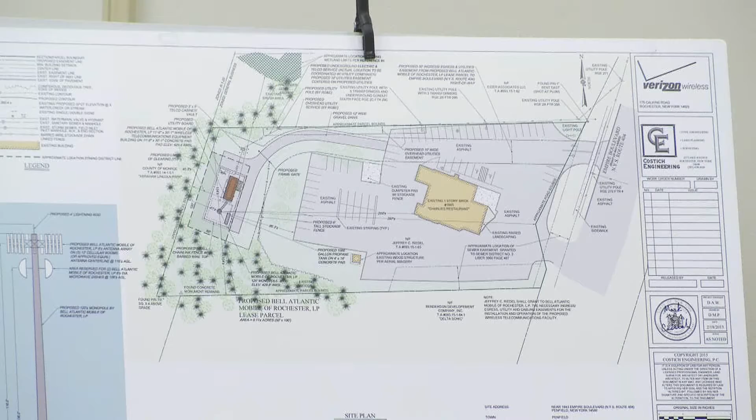Once this gap was zeroed in on by the RF engineers, a site selection process was undergone by Brett Morgan and his company, where they looked at over 35 different parcels in this immediate area to see how they would work from a technological perspective and also a land use perspective for the possible location of this facility. Those 35 sites included both the Charlie's Restaurant site, which we are applying for tonight, and the flagpole site that you were all discussing during your meeting.

Following the PRC's request, we submitted on March 12th some more detailed information that Mark was going over, and if you'd like we can turn to that. I know Mark pulled it up during your work session, but you can see that the coverage provided by that existing flagpole site is much more deficient when compared to the coverage that would be provided here, shown in green, by the proposed Charlie's Restaurant site.

That is for several reasons, which Mark touched on. The main reason is that the only available space within that existing flagpole site is at 46 feet antenna centerline, which isn't nearly high enough to provide the coverage we're looking for in this area. In addition, because of the way flagpole sites are, we can't fit all of the antennas that we need, and there's also the issue of the ground area for the equipment.

So after looking at all of those 35 sites, it was determined that the proposed site provided the coverage that was needed to fill that gap. It was also deemed to be a good site from a land use perspective. It's to be located in the back parking lot area. Here's a color rendering showing the existing site.

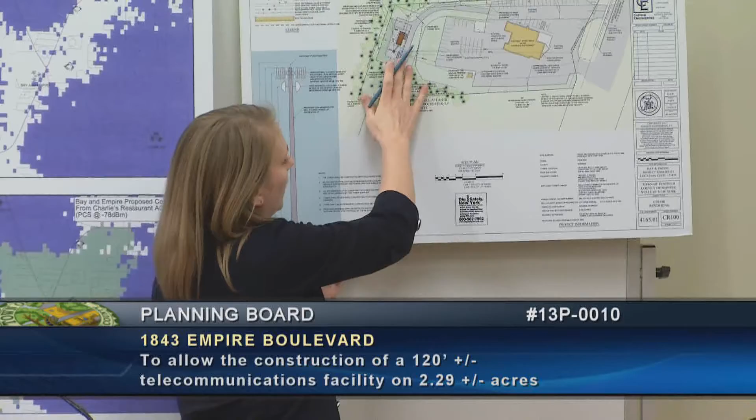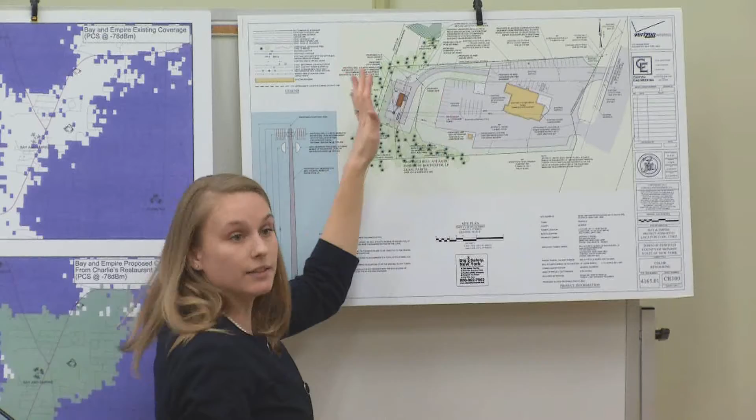Also, another interesting thing about this site is that the grade slightly declines as you go towards the site compound. So in addition to the natural buffer provided by the existing trees, there's natural screening that takes place because of the decline in the grade.

So I can answer any questions that you have at this point about either our March 12th follow-up submission to the PRC comments or the site, the project in general.

Anybody on the board? Good evening. So you looked at 35 sites, that's correct. So the PRC gave you some comments back regarding the requirements for a co-location study.

You gave us a response, and I just want to get clarification from you. Did you only look at your own towers, or did you look at all available opportunities for mounting antennas on existing towers? Absolutely. The company fully investigated any opportunity. Looking on our own tower wouldn't be helpful because we would already be there, so that wouldn't provide us any new coverage. So all of the sites we looked at were non-Verizon Wireless facilities, either raw land sites or existing towers, including an existing flagpole site, which is a stealth tower design.

Yes, I'm just curious, because I don't know that much about this stuff. But how come you get a couple of those white dots in there, but there's some green outside, like beyond that point? What are those blackout areas that don't get covered?

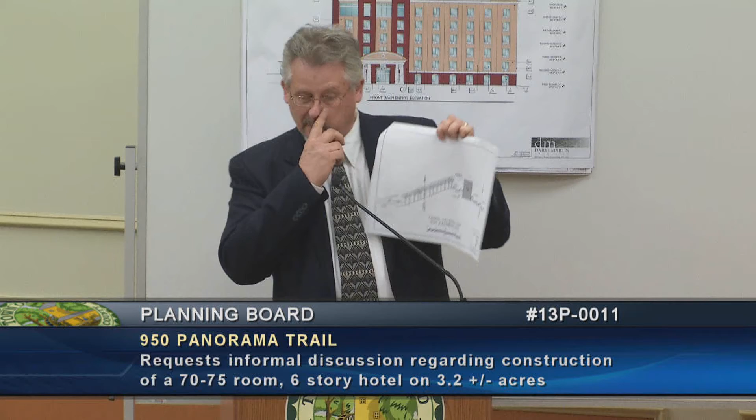That drawing, for anybody in the public, I'm sorry we don't have this large scale, but the point is there's a park down, is it Philbrook Park? Now it was Philbrook renamed. Then there's a steep bank of woods, and then our site and Panorama Trail. So we're basically just looking at sight lines to see if a tall building would be disruptive or out of place, looking from the park up the hill.

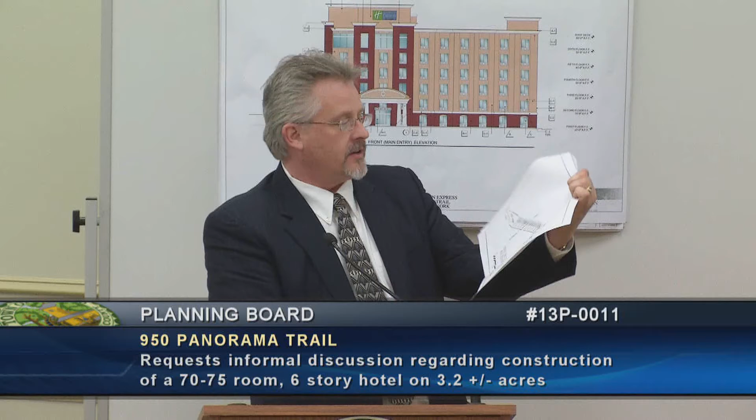My friend Steve here came up with this. Basically, from out in the park, you're generally going to be looking at trees. There's a pretty healthy stand of trees up the entire bank.

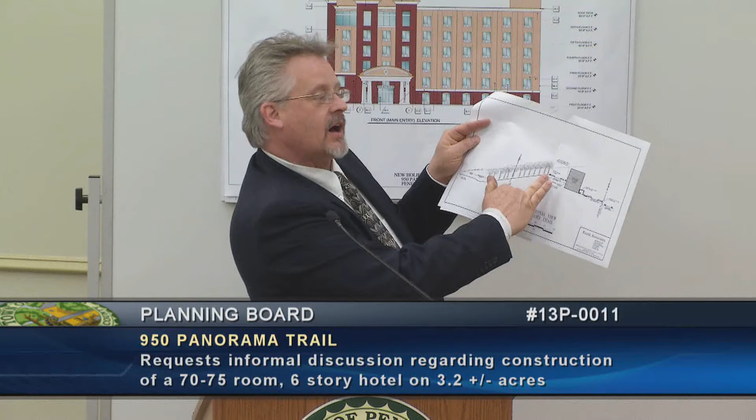Although you will probably see the building, at least the top floor or two, one of the things is our building is in the site, not out at the bank. Two floors are below grade in the back. So even looking at the crest of the hill, you really only see the top floor. I think that gives you the information you need to assess that.

With regard to setbacks, question 2 and question 4 are really a similar thing. As far as setbacks to the property, which is the golf course driving range, that's residential. There's a 150-foot setback there. If that were observed or held, really there's not much that could be developed on this property because it pretty much takes up the whole property.

I think the intent of that, from back when I was doing our comprehensive plan in my town and on our planning board, was to at least give some opportunity for municipal review if something went in the golf course where a commercial property could be not compatible to something in residential.

In this case, I think we'll pretty confidently go to the zoning board and request a variance for the setback to put our building within the 150 feet, and also, as far as a buffer, also not have a buffer, because right now the golf driving range is not something that I think would be affected adversely by a hotel. In fact, we actually think it would be fun to have a golf cart or something where people could go over to the golf course and drive balls.

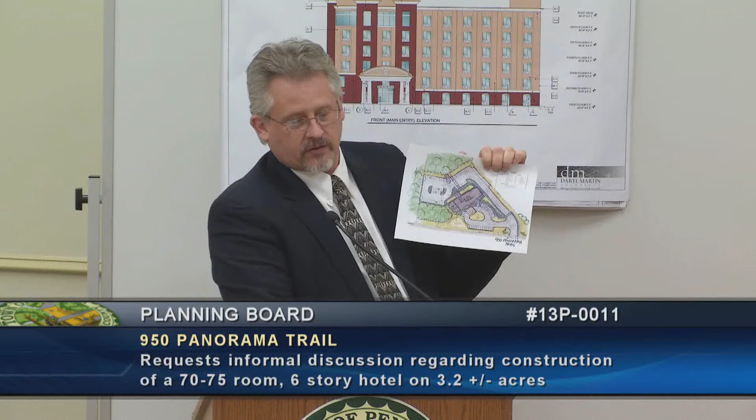Looking at it in plan view and looking at aerial photographs don't really quite give you all the information you need to see why we've selected that. The existing grade coming in is fairly steep. That's another comment on here, number 8.

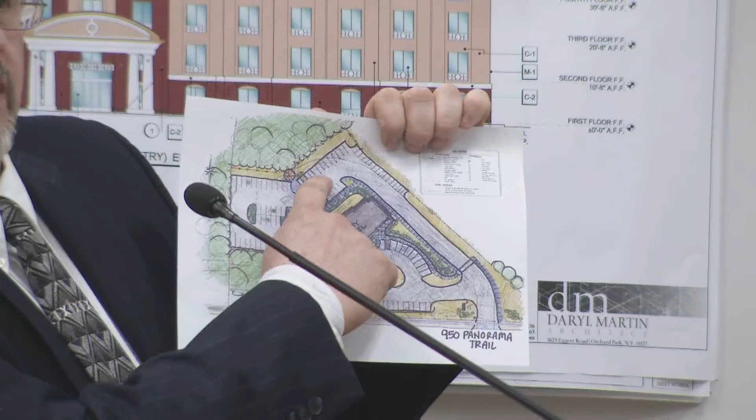In order to have this come in and service the first floor of the building, we needed to have this little cutoff spur pretty close to where you come in. As soon as you climb, you're up to the second floor, and this is actually the third floor of the building here. In your packet, there's a very good section of that.

It's the one labeled A5. It's probably the last one in your set. The porte cochere is on the first floor with the lobby. We have guest rooms on the second floor and up. The parking lot in the back is at the third floor level.

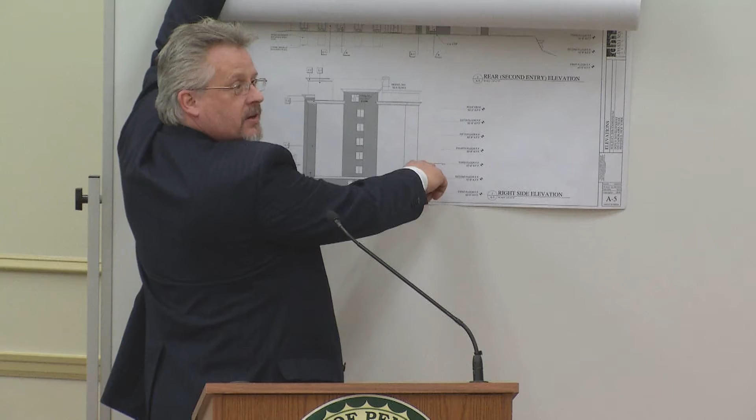If anybody's walked that site, you can see that it really climbs. So there'll be a rear vestibule coming in, but we need to have this driveway spur pretty close to Panorama Trail. Otherwise we're up a floor too high, and it would be quite a steep dive to come down to it. There's plenty of room for refinements as we go through the design process and actually have a field survey done. This was all done off USGS maps and walking the site.

The comment about Panorama Trail is we realize it's steep and there may be a little room for improvement, but we're trying to work with a site that's already there. Of any place, that is the best place on the property to have the driveway. It only gets steeper if we head towards the expressway.

Stormwater control: on this site we highly expect sandy soils, which are very good for infiltration. That's why, at a glance, this little puddle is our stormwater facility. If it was a normal situation with clay soils, this would be 4 or 5 times the size, so at a glance it looks inadequate. We plan to do infiltration on the site, so it will be designed according to DEC standards. Also, the geotech engineer is very familiar with this whole area, and all the hills and drumlins here we expect to be quite sandy.